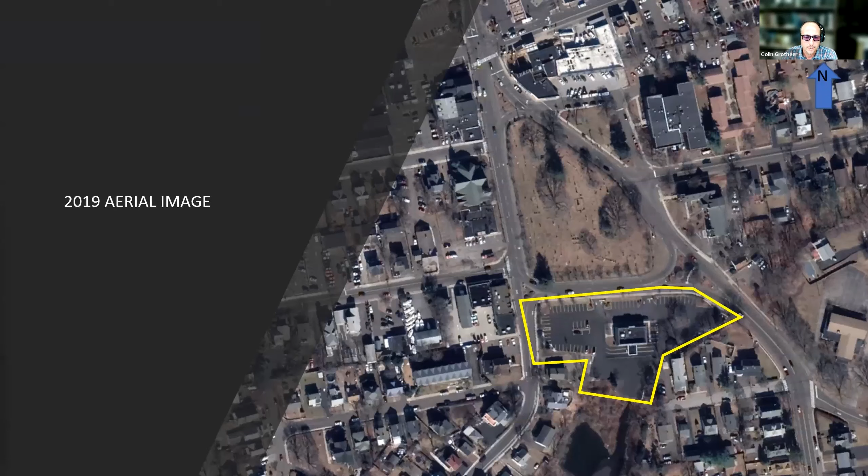This is the site as it sits today—you can see it's largely impervious with a very small building on it, relatively underutilized. This 1965 aerial shows it's been impervious since the 1960s, so we're dealing with approximately 60 years of impervious surface adjacent to Mill Pond.

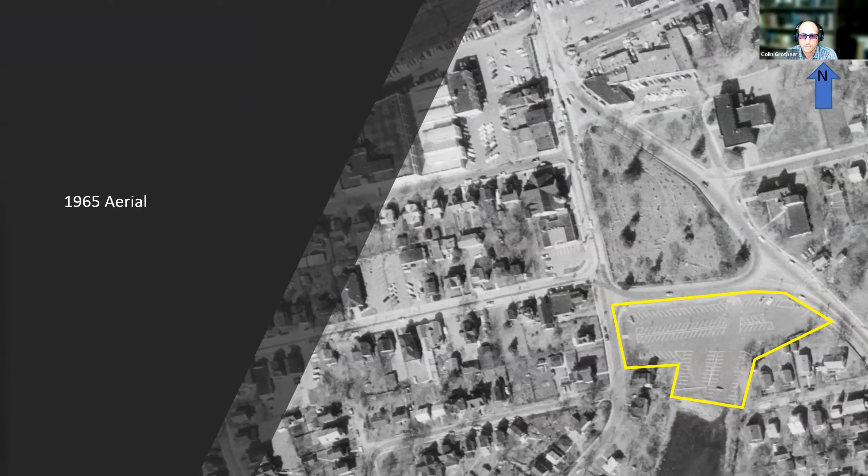We believe the new plan greatly improves upon that by pulling the impervious surfaces back from the edge, providing amenities as prescribed in the East Norwalk Village Transit District that was just created.

We've got rain gardens to help deal with water quality and infiltration, and we've also got pollinator plantings in that zone to encourage pollinators to migrate and pollinate the flora in the area.

There are rain gardens, and per the regulations, at least one of them is going to be a rain garden of interest—an active rain garden with some sort of art installation, so there's movement to it when it's raining or shortly after, which you'll be able to view.

We're providing a public plaza in this area, functioning as a pocket park off of East Avenue that would be available to the public.

One of the things contemplated is providing continued public access down to this landlocked city-owned parcel. This is just a quick stab at a concept of what could go there, which would be subject to city approval since it's the city's land and city developing that concept.

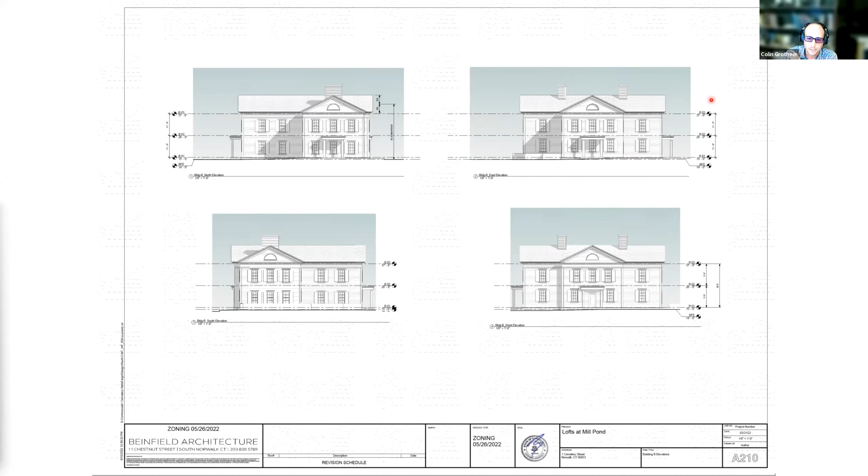This would also have some office space on the first floor, so hopefully it will be an active building throughout the day. And that's the end of the overview. Happy to go back and pull up any of the slides.

I think the site plan is probably the best one if you have any questions for us to speak on.

Thank you. Yeah, and just to add, I don't think we gave you the overall program. It's proposed as 77 apartment units and about just over 5,000 square feet of commercial space, with retail space on the corner of East Avenue and Cemetery, and more of a service and or office space as the site bends around towards Gregory on the ground floor of that building.

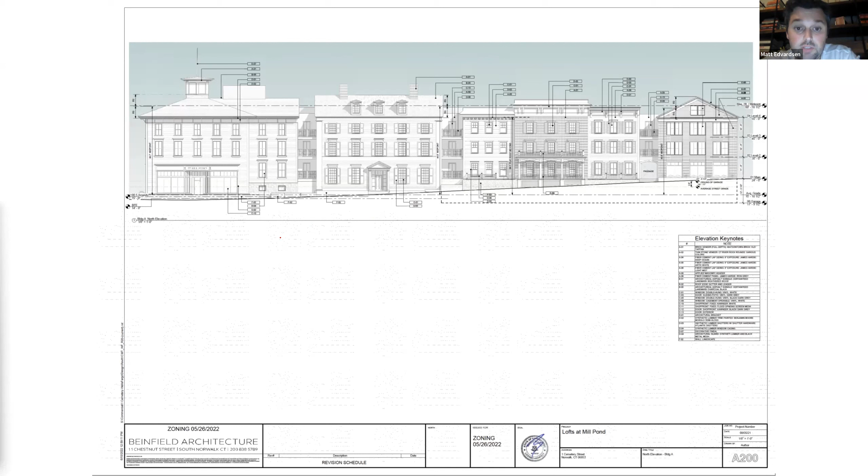Colin didn't touch on it, but if you go back to that elevation, you kind of pick up as you're driving around this area there's a big topography change from East Avenue as you go towards Gregory Boulevard. You can see that with that angled line there, Colin. If you highlight that, we've tried to step the building slab to allow this building to meet the street appropriately and not be pulled off the ground and not activate the street.

What's not evident here is that behind this and below grade, as you get closer to East Avenue, is a lower level basement parking, and it's completely hidden from the viewpoint if you're on the public right of way.

Is the mill pond polluted?

I don't have an answer for that. I'm not sure I'm capable of answering that one. I would defer to staff. I can try to do some digging on that, Mr. Chairman. Thank you.

I've spoken to a number of people about the buildings, and there's a certain amount of excitement that they've generated. I feel a little bit different. Although it's the other side of the railroad tracks, this really is an entry building into East Norwalk, and I think it deserves to be as special as your economics will permit. At least in my view, looking at your preliminary drawings, and again just my opinion, I'm not quite sure that it measures up. But again, just my opinion. I'd like to see people enter into East Norwalk, look at the building and say, wow.

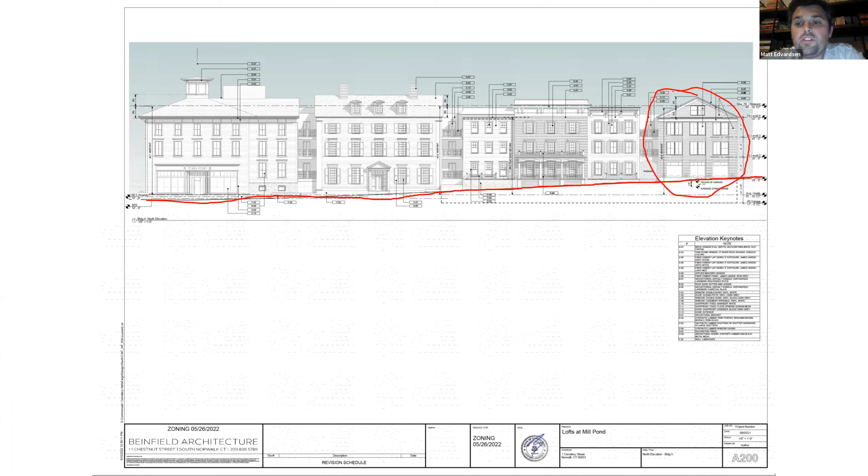Yeah, so this is the Cemetery Street elevation where the grade changes is the greatest. This building that fronts on East Avenue, as well as the corner of Cemetery Street, is going to read obviously less intensely than the one further down the slope because of the grade change, and there's really no getting around that.

So it turns the corner and proceeds down East Avenue with that vocabulary, but then it opens up to the public plaza, and then transitions to the leasing office on the other side of the property going down East Avenue. And then the Italianate - where would that real estate office be?

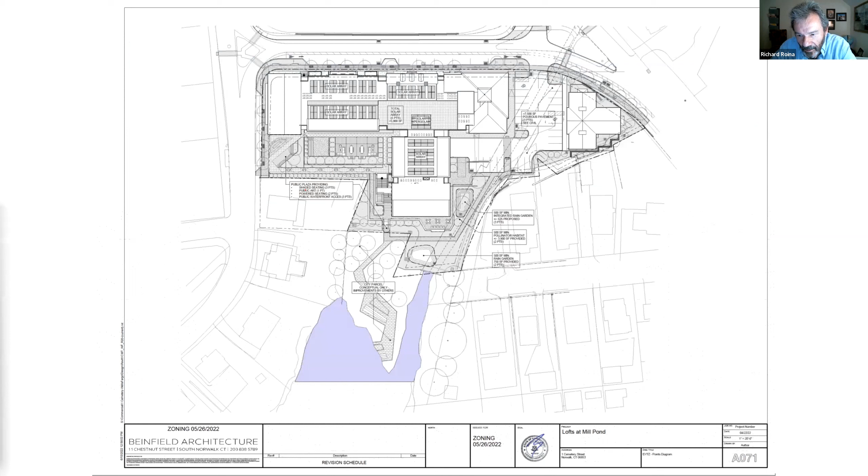Colin, you want to go back and just highlight the frontage that the elevation was depicting from East Avenue down to the leasing office. So that was this frontage right here - that's what that elevation was depicting along Cemetery Street. So you're looking that way, and then it does wrap around here to the public facing side, and here continues the brick vocabulary of that building.

And then we wrap the Italianate structure around there, and this is also the little Georgian house. And where's the drainage easement that you were talking about? That's this space - it kind of goes all the way down the side. Technically the easement does give us the ability to build over that easement, but we decided not to even attempt to try to do that and satisfy all the requirements.

I just didn't remember the front of the property being that straight, but I guess it is. It always seemed like it was kind of going around a round corner there, but maybe not. Oh, yeah, there's a fair amount of radius in this area.

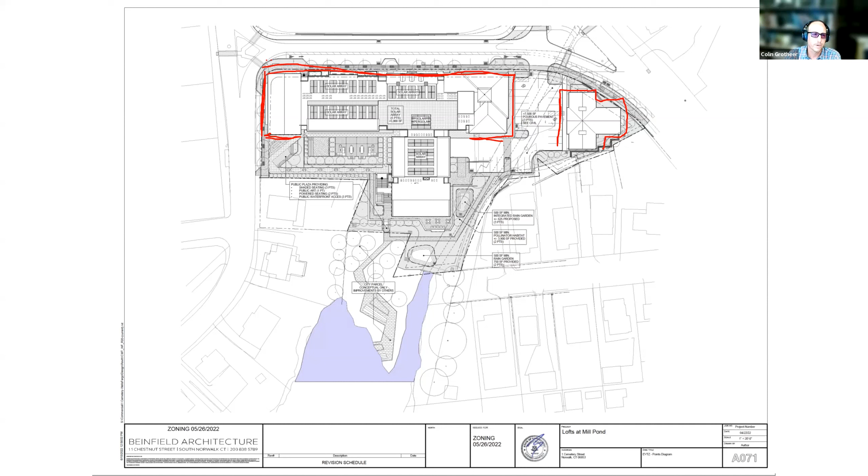I think there is a reduction. I think the bigger thing I don't have the numbers on is the quality of the reduction, right? Right now it's just currently a huge asphalt parking lot, and we haven't calculated the softscape available on the plaza and the catchment areas versus the green space available. But as it sits, it is a reduction in the impervious surface. The other thing is one of the village EVTD zone regs is that we're taking advantage of one of the points for the pervious pavement in the parking area that is exposed.

So we'd be using that, and that would be technically pervious. Then you also have the softscape, which is going to be nicer landscaping than the shrubs there today, plus the resident plaza and roof drainage. That's all going to go to the stormwater quality controls prescribed by the drainage manuals that DPW puts out and zoning has us follow, following best practices. So it's going to be treated much better, to a more current standard than it's currently being done today.

Yeah, I'm trying to pull it up. The answer to your question is in our engineering report. I'm trying to pull it up, and I remember it does not include... there's a reduction, but that reduction does not include the pervious pavement we're proposing, or the landscaped courtyard structure that will further reduce that. That just wasn't included in the calculation. But before we conclude, I can find the information.

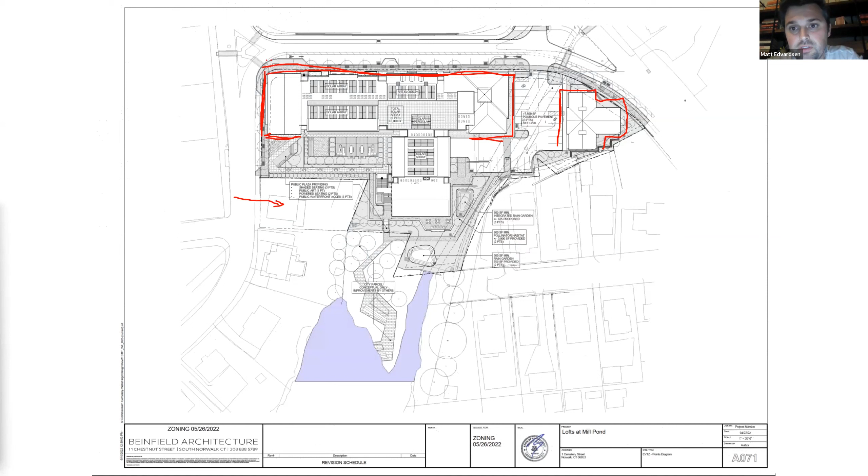Now, this corner space we definitely envision as more active, potentially spilling out into the public courtyard. We have this covered passageway that should be wide enough to allow access not only from East Avenue but through the building from Cemetery Street. Potentially there are opportunities for outdoor but covered dining if the ultimate tenant of that space needs that type of use.

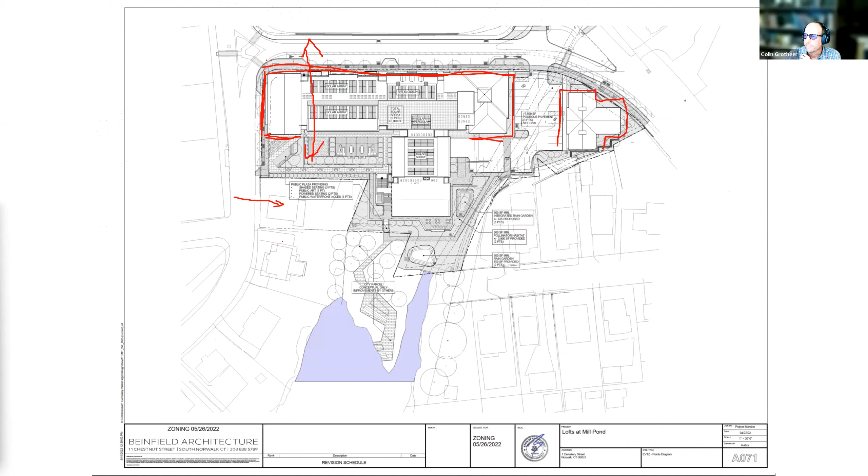How large is that public courtyard? I believe it's around 4,000 or 5,000 square feet. Yeah, I believe so - you have the breakdown between...

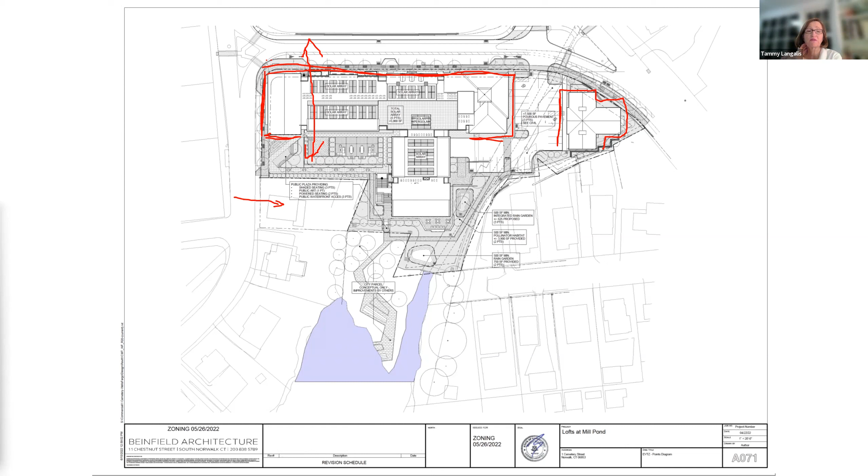Sorry, I just want to echo Mr. Schulman's observation that when you showed us the front schematic, it does look rather huge - maybe it's by comparison that there's a little bank there right now and the rest of the space is open, but visually it's rather imposing, I guess is a good word. So as we're thinking about this, we just want to keep in mind the scale of the other buildings in the neighborhood.

And I know these are the new East Norwalk zoning regs, the 3.5 stories, but just to echo that - one of your regulations for single family houses, your height to midpoint is typically 30 to 35 feet depending on what zone you're in. So this is no different - it can't be built to a height essentially higher than a large single family house in most of your zones.

What's the acreage of the property? I think it's 1.5 acres, Matt, or close to it. About 1.66 acres. Okay, so you could ostensibly have 3 big houses on something like that if it was single family zone.

Okay, thank you. Do you all have the breakdown of units? The 1 bedroom, 2 bedroom, 3 bedroom, 4 bedroom?

It sounds like you're going as high as... Yeah, sure. So 1 bedrooms, and this includes a couple of studios, not many, but 1 bedrooms and studios, there's 39. 2 bedrooms, there's 22. There'll be 13 3-bedroom units. And we're able to, based on those lofts, allow for 3 4-bedroom units, which are larger units than we typically propose. But we think there's a demand for it, and the neighborhood should be able to support that. And I believe you're including 10% affordable housing, workforce housing. Correct. Yeah, per the regulations, we're providing the workforce housing on site within those 77 units.

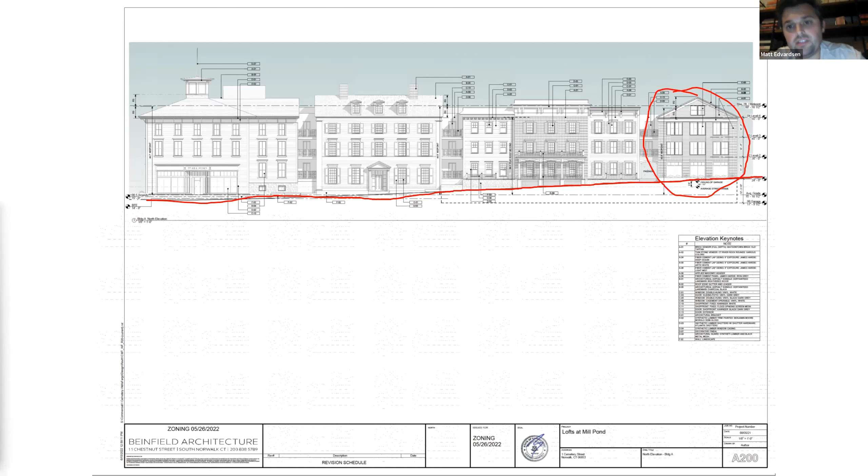So Colin, you want to flip back to the site plan? Yeah, sure. Nick, while they do that, there's action that we're going to be taking this evening. We're going to, or I'm going to ask you to authorize an outside peer review of the architecture and an outside peer review of the traffic as well.

Please go ahead, I apologize for interrupting. So the curb line on this subject property side of Cemetery Street is not being altered. So any restriping or reworking of these on-street parking spaces or the bike lane, that's not a requisite. I think it's a nice addition, but it's not a requisite for this project. The left sweep as you're coming down Cemetery and looking to go back north towards 95, that's getting altered slightly based on the recommendation of our traffic engineer. Currently, if you drive by there, the trailers of trucks kind of hop the curb, so the radius just isn't sufficient.

As part of that, we're shifting it slightly to align with our proposed curb cut here, so that's probably the more critical one. If for some reason that doesn't get worked out, even though it probably should regardless of this action, the site plan would have to change slightly and probably move this curb cut further up, closer to mid-block, and maybe only access it through the facade, breaking up the facade to get direct access into the garage, which probably eliminates or greatly reduces the possibility for some of this on-street parking based on that curb cut and sight lines.

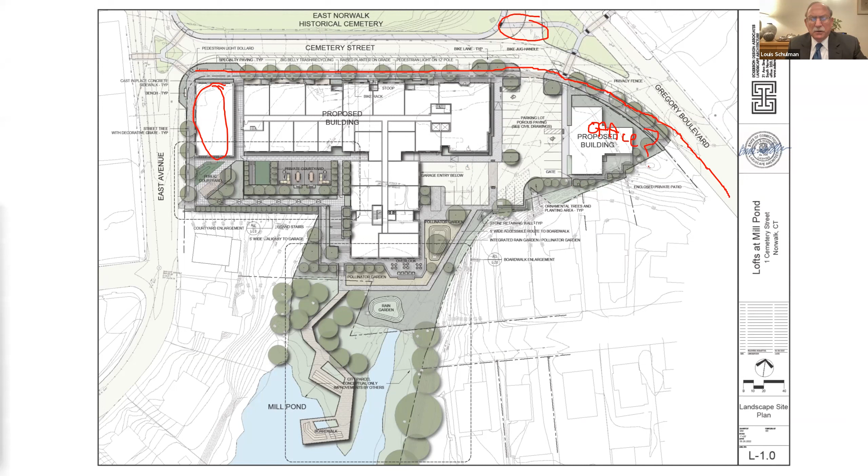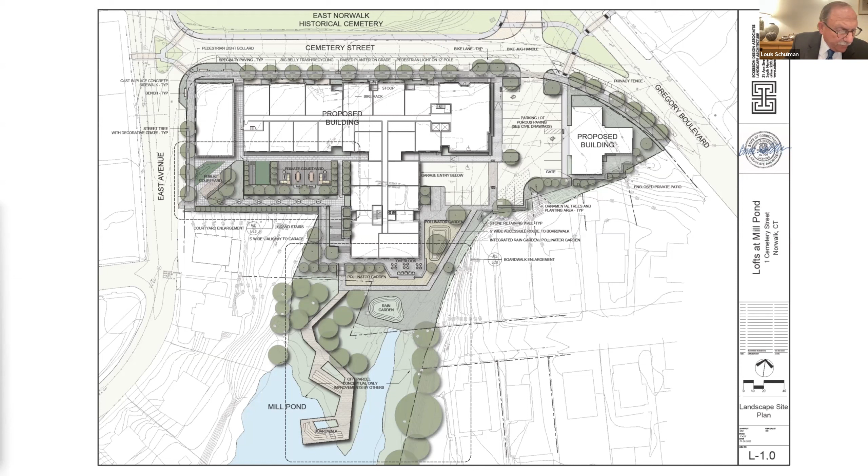Well, any other questions before we move on to our action items? All right, Steve, I assume we can do this as a single item? Yes. Okay, then I'd like to have a motion to approve the hiring of a consultant for an outside architectural peer review and for an outside peer review of the traffic.

Richard moves. Is there a second? Brian seconds. Let's do a roll call on it.

Okay, I'll just go by who I see on my screen, if that's okay. Ms. Jordan Byron, yes. Mr. Cantor, yes. Ms. Wells, yes. Mr. Rowena, yes. Ms. Langalis, yes. Mr. Mushak, yes. Mr. Baxendale, yes. I don't see anybody else, I'm just going to go with Mr. Schulman. Mr. Williams, yes. All yes. And I'm yes also. All right, so it again passes unanimously.